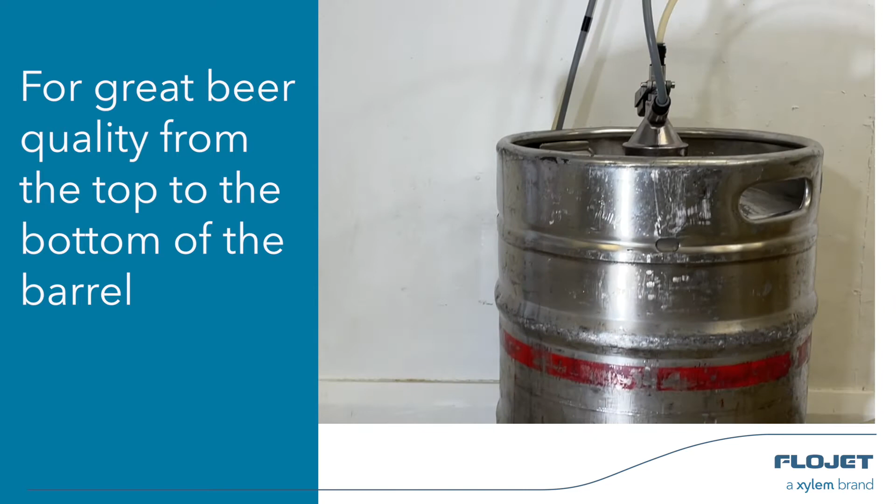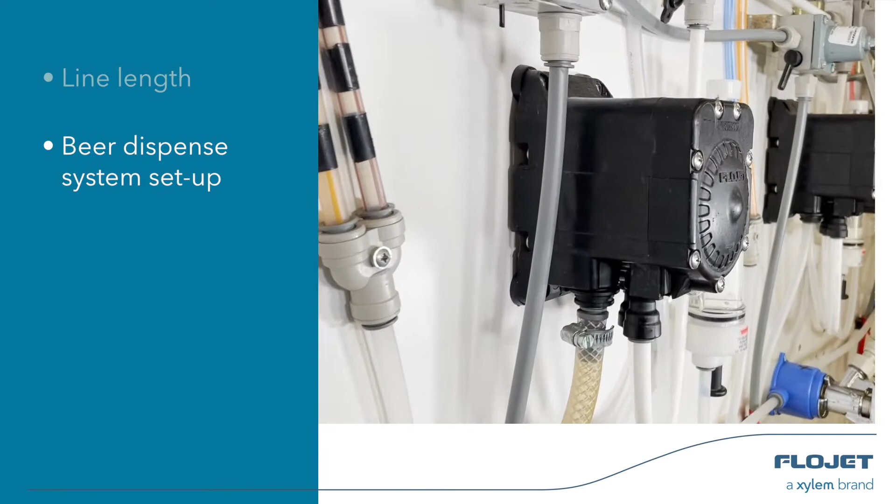Serving perfect draft beer glass after glass, from the top to the bottom of every keg, cask or beer kettle, can be a bit hit or miss. This has as much to do with how long your lines are and how your beer dispense system has been set up, as it does with the range of beers you serve, the volumes you sell, and the temperature they're stored at.

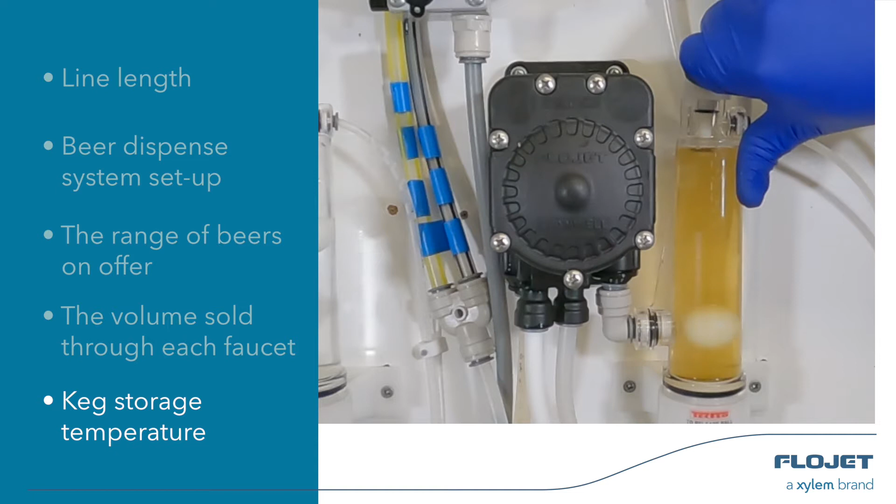The Flojet G56 pump has been designed to take all that variability out of how your beer dispenses and to ultimately save you money. Without the G56 pump, what typical problems do customers have?

Every time you cut the head off a glass of beer, you're throwing profits away. And any time beer flows over the side of a glass because the beer is too lively and over-gassed, you're also throwing profits away. Think of it like this.

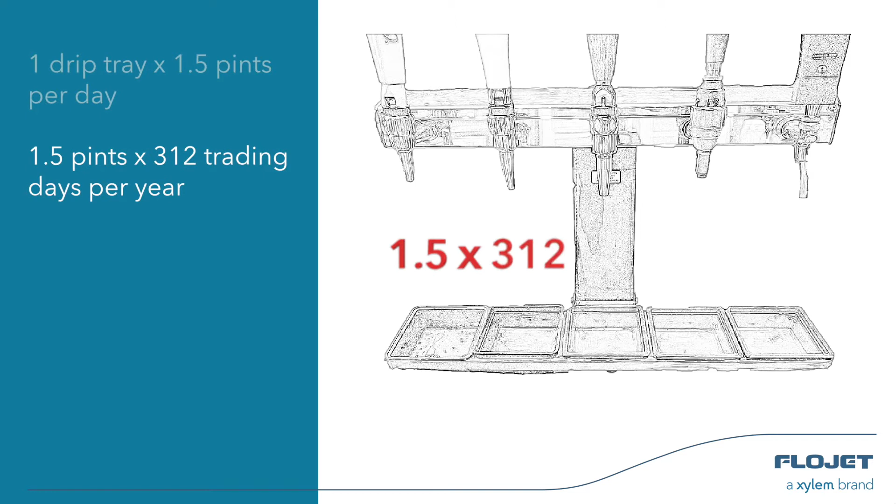If every faucet in a bar wastes just one drip tray of beer each day, and trades for 312 days in that year, that's equivalent to approximately 468 pints of wasted beer, worth $2,761 per faucet of beer waste every year.

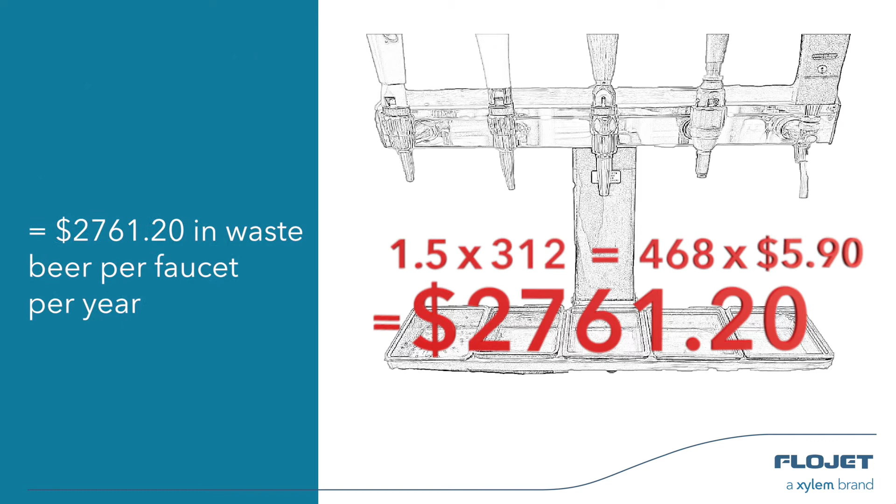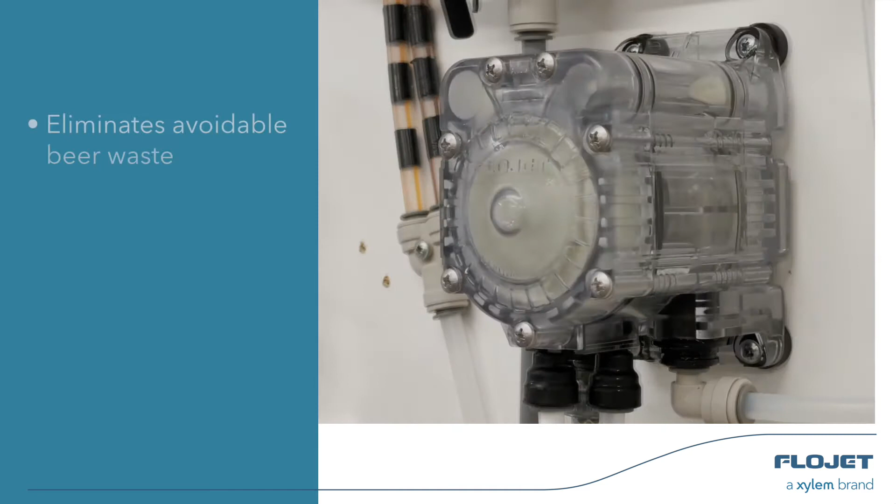The Flojet G56 beer pump. For a small initial cost to set up, the G56 pump pays for itself, quickly becoming a money-saving device in your cold room. It does this by helping to eliminate avoidable beer waste.

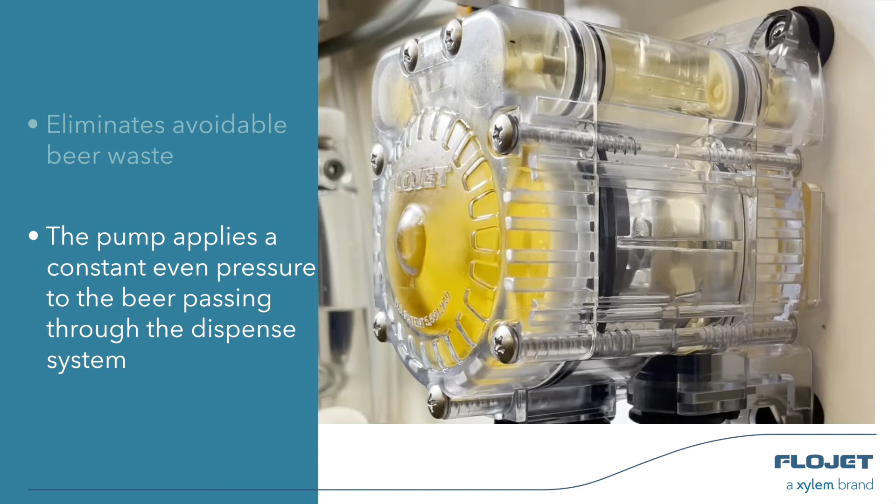The G56 beer pump works by applying a constant, even pressure to the beer passing through the dispense system. This is particularly important for systems with long beer lines and where temperatures are liable to vary.

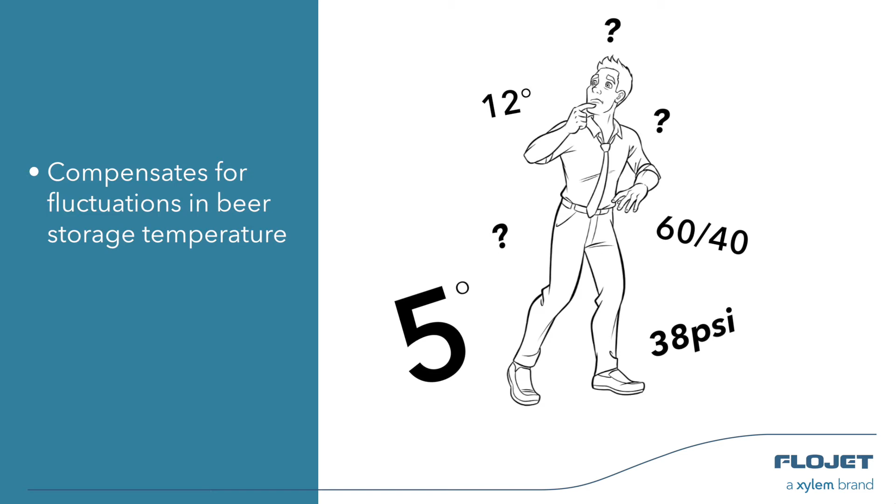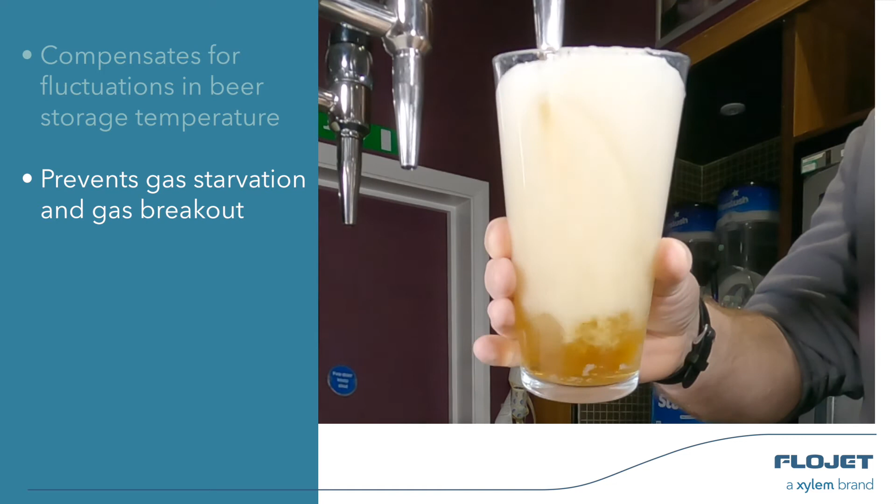Beer stored at 12 degrees and dispensed using 60-40 mixed gas needs a top pressure of 38 psi. But if the beer temperature rises by just 5 degrees, the top pressure needs to adjust by 8 psi to compensate. In long lines, if pressure is insufficient to propel the beer to the faucet, CO2 from the beer is released, causing the beer to foam, resulting in wastage and ultimately lifeless beer and lost profits.

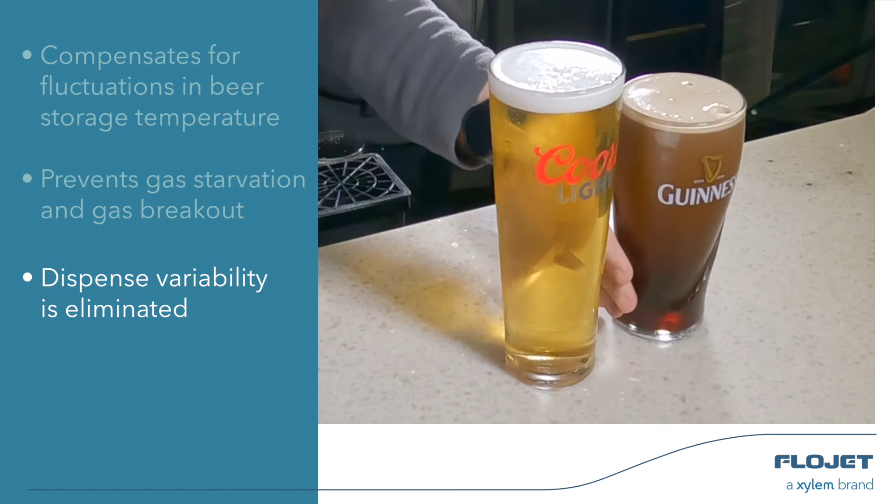Having a Flojet G56 beer pump fitted means that this variability is smoothed out. Not only that, the pump can be an essential part of a beer line cleaning system with wall-mounted cleaning sockets.

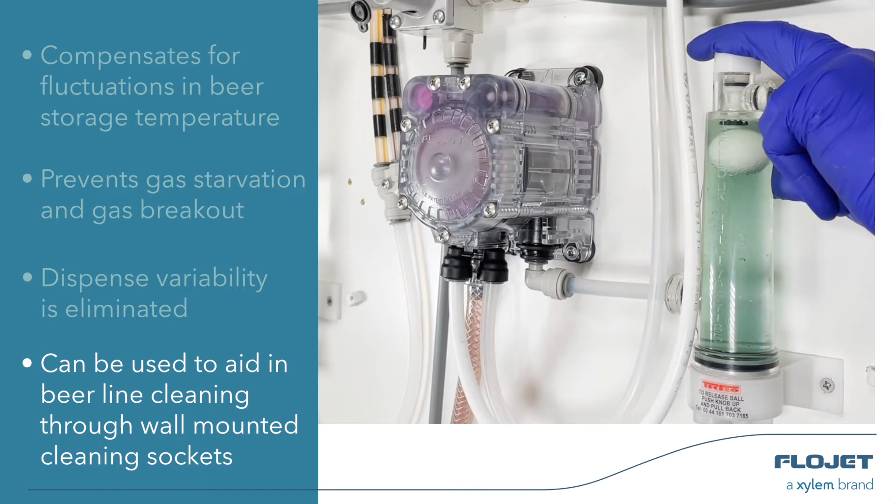The Flojet G56 beer pump product benefits. This pump has quickly become an essential part of the standard beer dispense system.

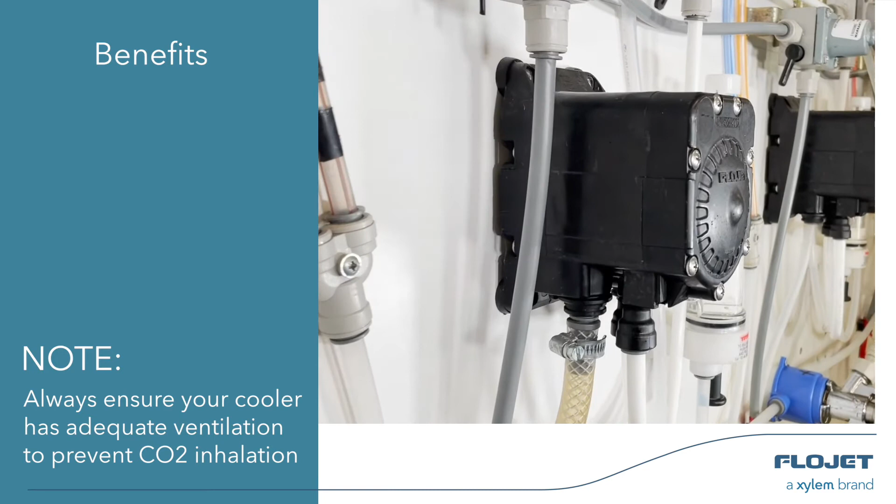Installation of the Flojet G56 is simple and straightforward with push-fit 3/8 fittings. Other fittings are also available.

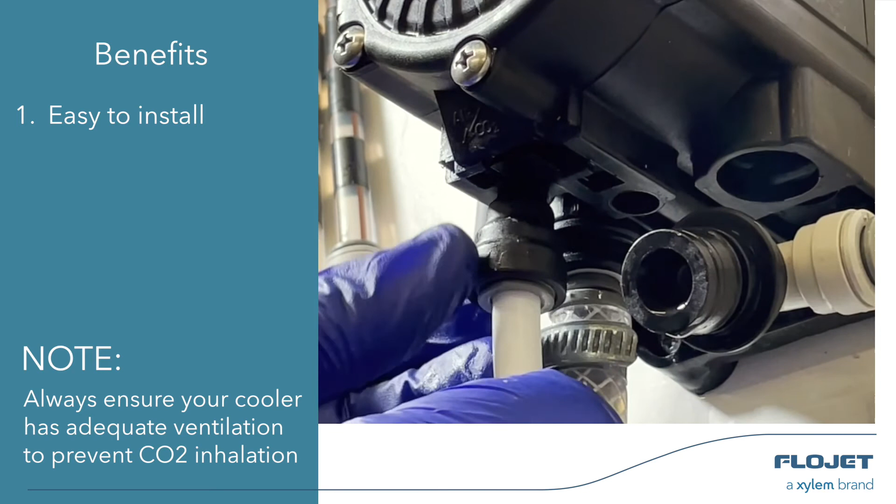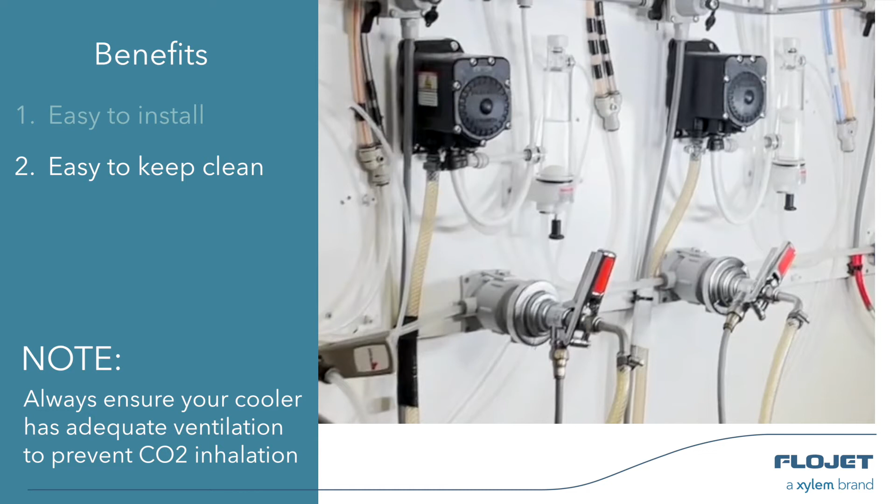The Flojet G56 pump is extremely easy to keep clean. As part of the beer line, it is connected by a 3/8 line to your keg coupler and gets cleaned every time you clean the beer line.

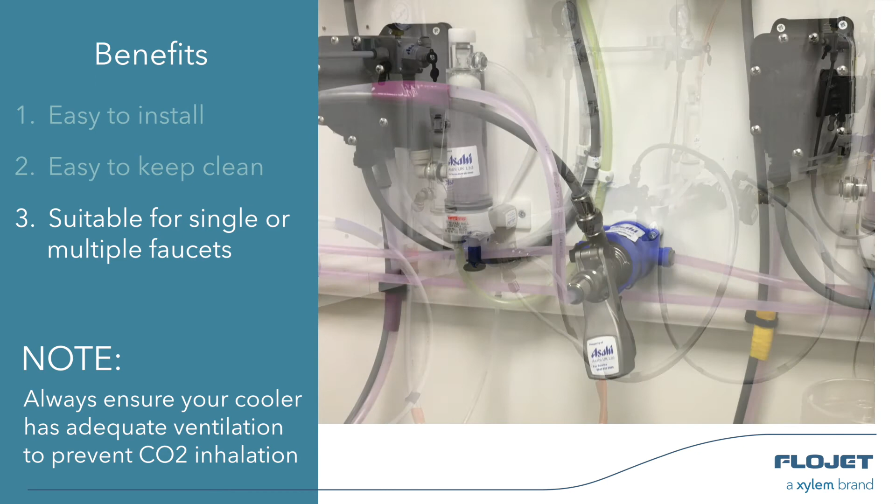The pump that pushes the beer through the system is CO2 gas or compressed air assisted, but this gas or air never comes into contact with your beer. As a result, your beers retain the flavours and characteristics that make each one of them unique.

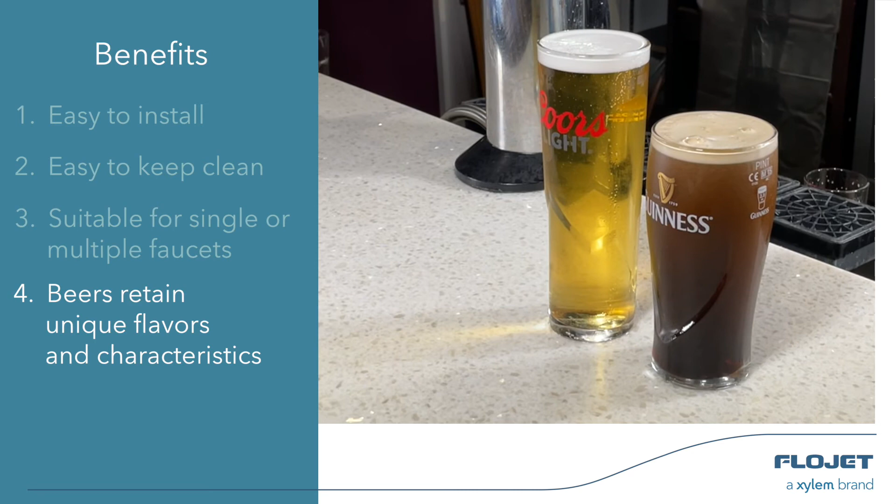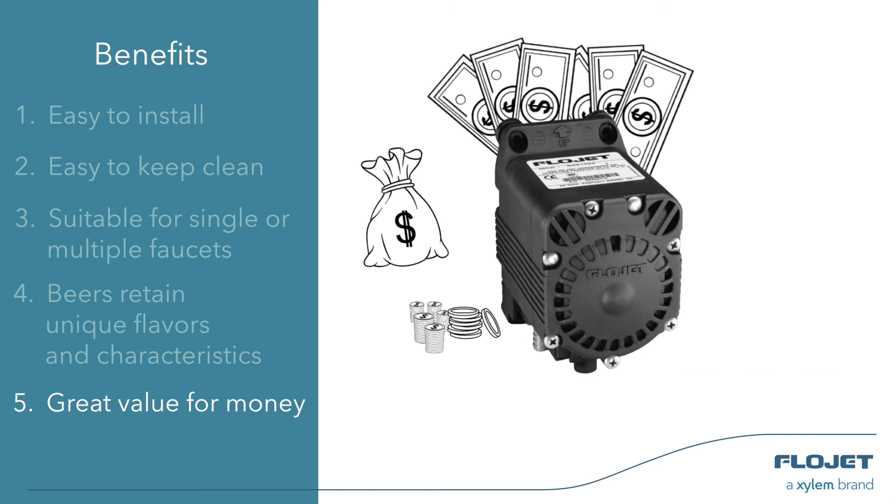The Flojet G56 is surprisingly good value for money and can pay for itself very quickly just by reducing avoidable beer wastage.

So, if you're looking for great quality beer from the top to the bottom of every barrel, and you want to make sure that every pint you serve puts money in your till, then you've found the answer, the Flojet G56 beer pump.